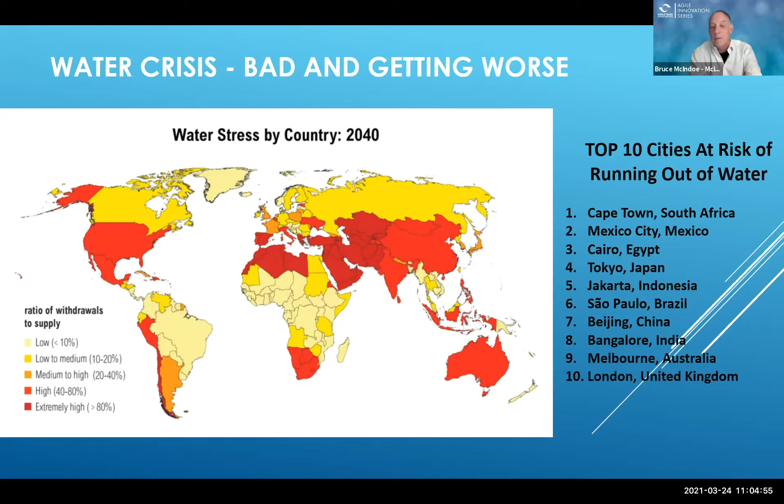And so where is the water going that we're dealing with? When we talk about shortages, we're pulling a lot of water out of aquifers that have stored up over hundreds of years or even millennia. These ancient reserves are not easily replaced. And that's what a lot of, for example, the drought in the US is driven by - we're basically pulling money out of our savings account, but we're not putting money back in.

70% of that water is consumed in agriculture, and we're going to talk more about that today. But that's the number one consumer. 11% represents what we use for our living, in our cities and those kinds of things. So as we think about making gains on water conservation and water management, agriculture is and continues to be the prime target.

The other obvious thing we think about is people. In the first session on water and people, we learned that if we don't have water within 2 or 3 days, we die. When you talk about an existential threat for a person or a community, water is it. That's why for countries that don't have their own indigenous water sources, it's a national security issue. If somebody turns off the tap, that's it.

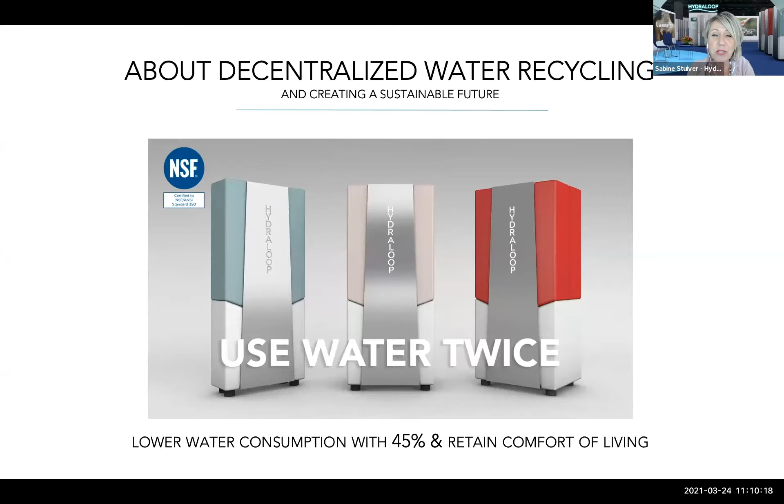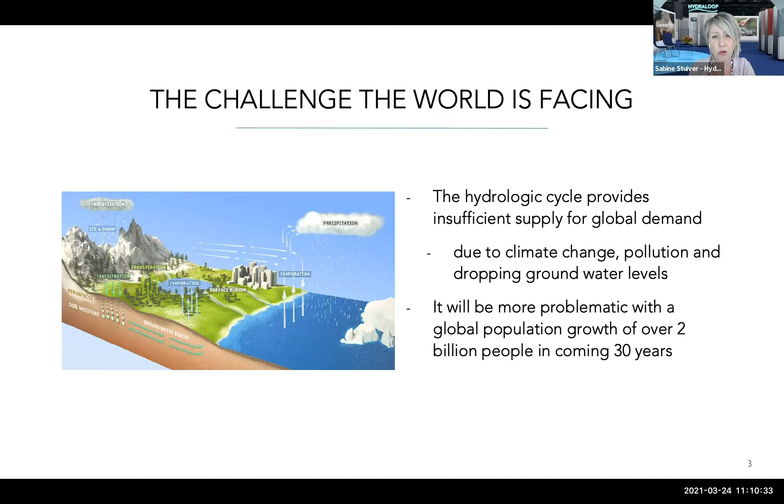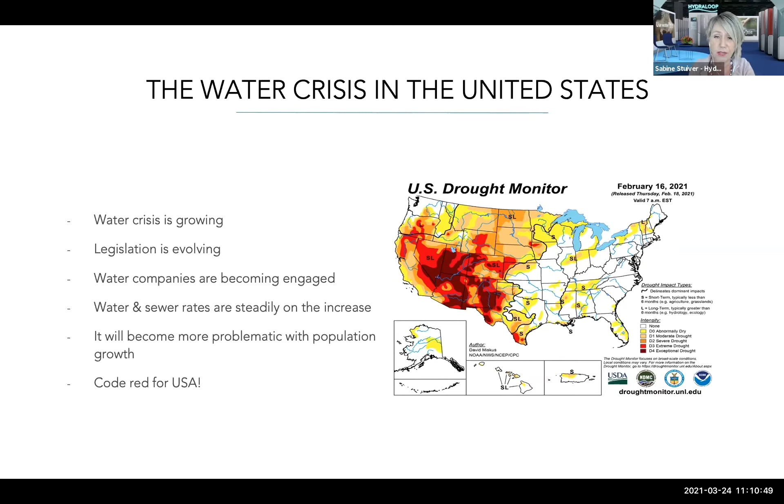So more and more research is pointing to the same direction, to our vision of the future, and that is to use water twice. We think it is very easy because we can be so much more efficient in the use of water by using decentralized recycling, water recycling as an alternative source. And we look at it like this.

Every building has its own water source, and this is lightly contaminated water. Think about hand basin water, shower, air conditioning or cooling water, etc. If at the building, at the spot, decentralized, we can collect this water, treat it and disinfect it, so it can be reused again on the spot, you can actually save up to 45% on tap water supply, and you also have a lot less wastewater.

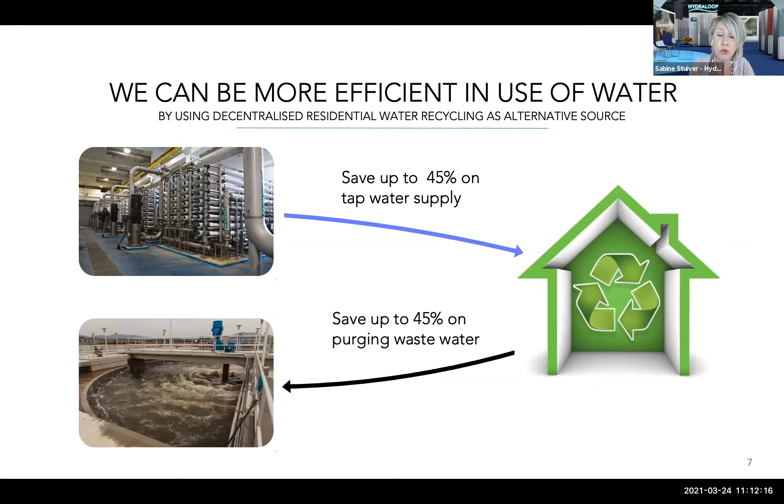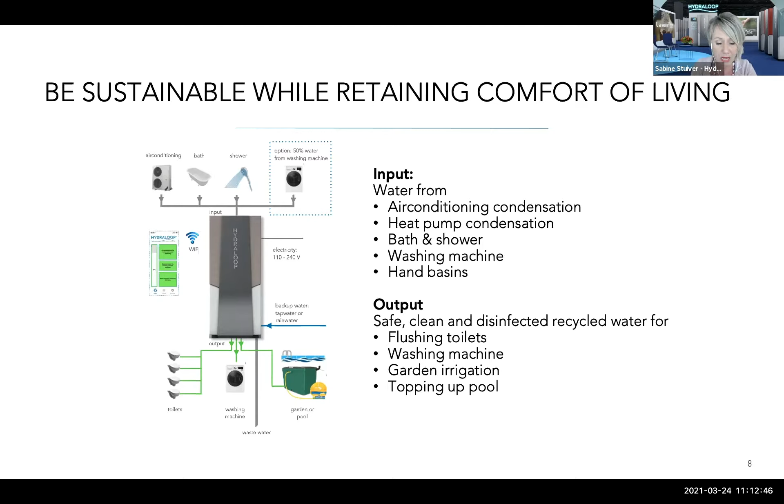It's also 45% less. Now, what kind of water can a system like this actually treat? Air conditioning condensation water, heat pump condensation water, bath or shower water, washing machine, hand basins. The output is safe, clean, disinfected, recycled water. This can be used for several purposes like flushing toilets, the washing machine, garden irrigation, or topping up the pool.

We have created a very new treatment process that we've patented, and that's also why we're winning so many awards, because we do not use filters, membranes, or chemicals. Chemicals are not sustainable, so we're not going to use them. Filters and membranes work perfectly in water treatment, but they clog and need a lot of maintenance. We wanted to create a consumer product that needs very little maintenance.

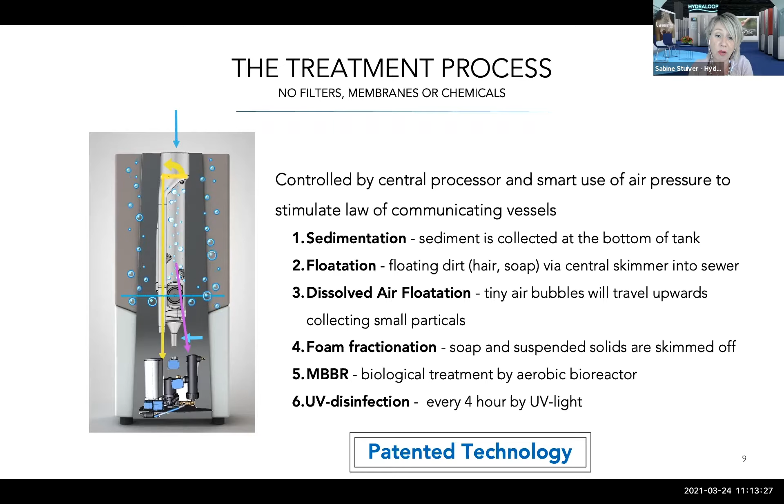So what we've done is we've combined 6 existing techniques, which you can all see here, and that is very unique. With that, we have created a completely new water treatment technology. And obviously, the water that then comes out has to comply with the highest international standards, and it does.

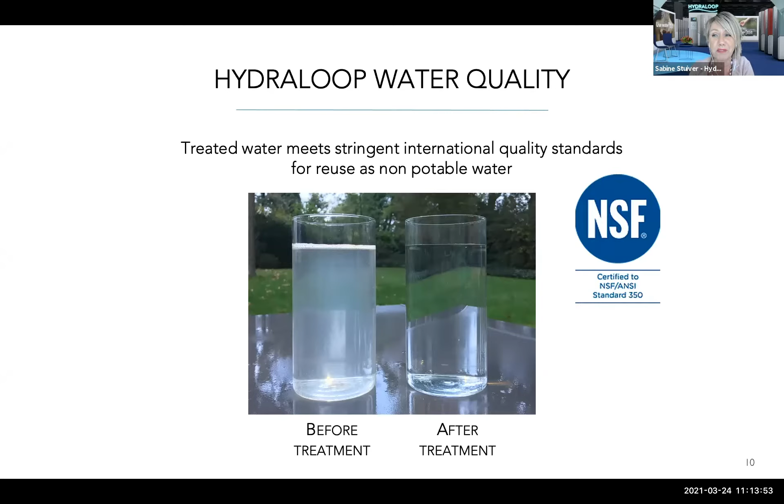To visualize it, on the left you see the water going into the system, and on the right you see how it comes out. I'm very happy to say that we don't only meet NSF 350, we are actually certified for NSF 350. So the water quality is perfect for all the usage that I just mentioned.

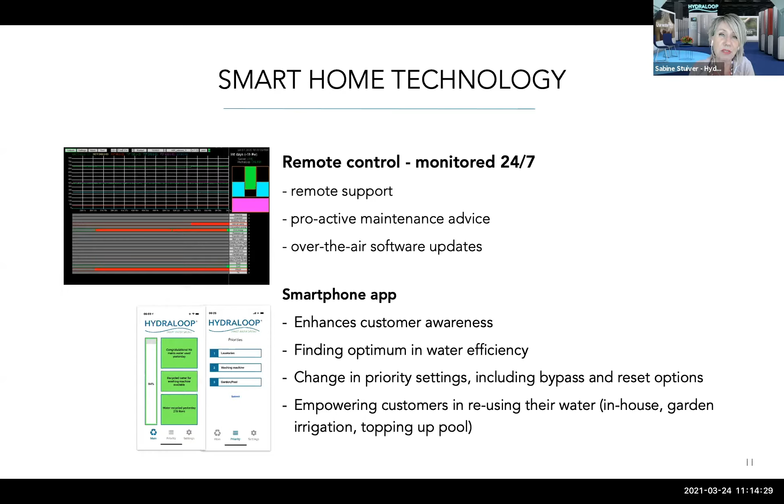Now, all the systems are remotely controlled and monitored 24/7 in our server. That means we offer remote support, proactive maintenance advice, and over-the-air software updates. All this information is returned back to the customer, and that gives them the information. It enhances their awareness of how much water they have used or saved. They can find an optimum in their water efficiency, but they can also change their priority settings, and it empowers customers to use their water in the way they want to use it.

Return on investment - this is asked a lot. What is the return on investment on a system like this? Well, sometimes I think, why do we talk about return on investment when we're getting close to day zero? But it depends on country, region, and municipality. It can be between 2 and 12 years, depending on where you live and the price of water and wastewater.

But some of the benefits are anyway, 45% savings on tap water consumption. You reduce your wastewater also by 45%. You have savings on your water and wastewater bills, but there's also an energy reduction component and a carbon footprint reduction. It increases the property value because it complies with increasing regulation and sustainability requirements, and you become more resilient and off-grid.

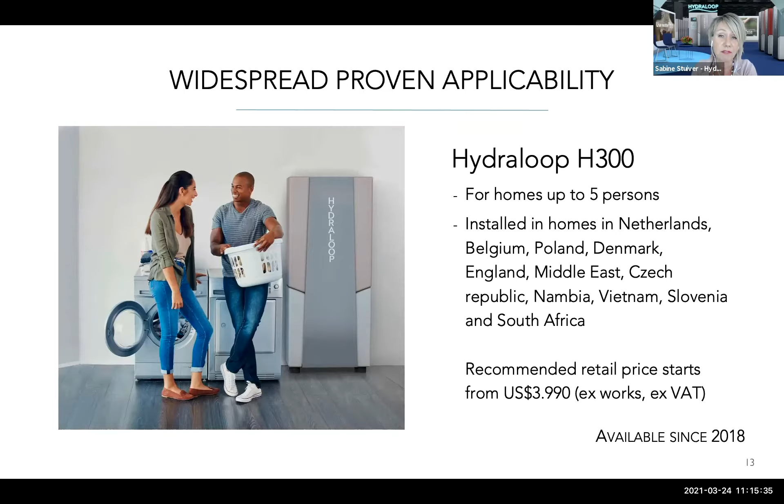Since 2018, we have come to market with the H300, the Hydraloop H300. This we created for the home, for a family of 4 or 5 persons, and we've already sold in many countries in Europe, the Middle East, and Southern Africa. This year, in January, last January in Vegas at CES, we launched the Hydraloop H600. Now, this is the bigger brother, so to speak.

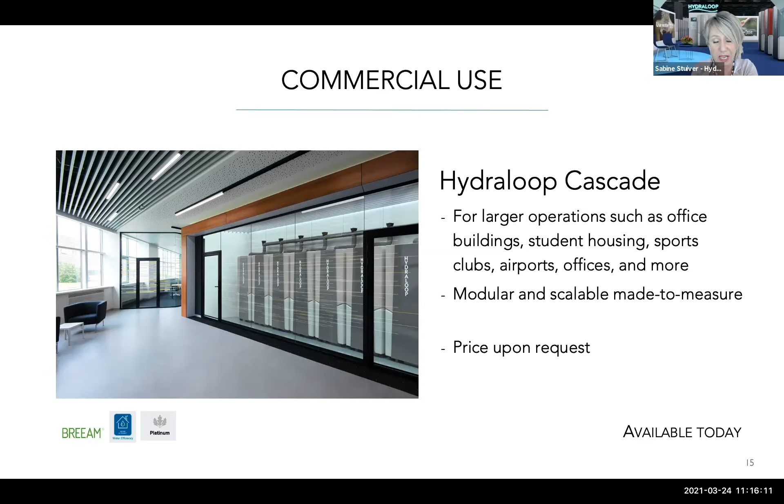Some of our offices are in the US at Hydraloop Inc, and we're actually just opening a joint venture in the Middle East as well. Our systems are Dutch designed, made in the Netherlands. Here you can see some pictures of the factory, and this is the vision we are propagating everywhere.

All construction should be built recycle-ready, because you're building for the future, and it can so easily be prepared for the installation of a water recycling system, since the plumbing costs hardly any extra and it's very easy to do in new construction. In the coming 20 to 30 years, all other buildings will be made more sustainable or will be changed, so that's a perfect timing to also install a decentral water recycler then.

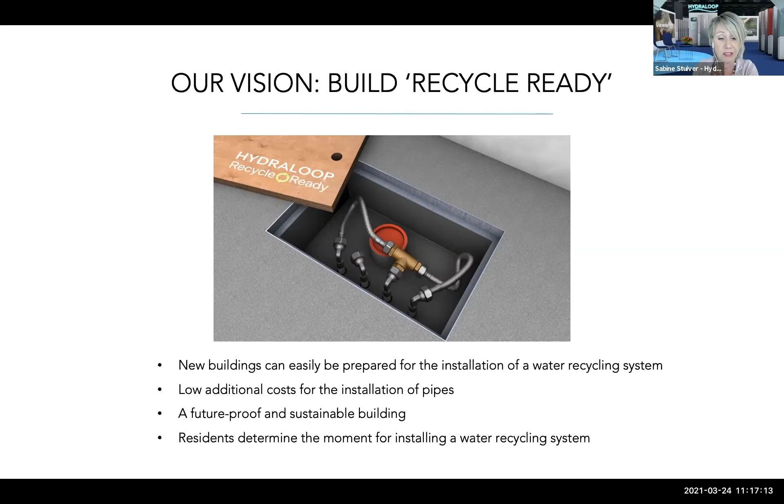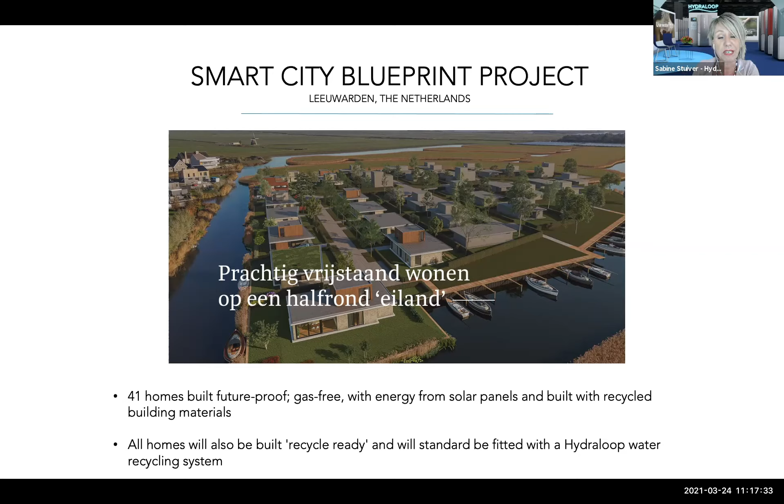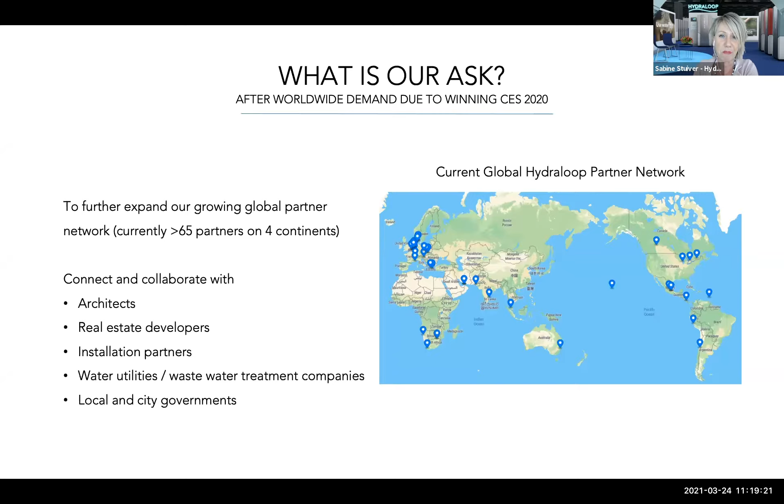That mission is that within 10 years' time, no building will be built without its own decentral water recycling system. It will not only be a Hydraloop system, we won't be able to do that alone, but we would like to be the Tesla of water recyclers in the world. So this is our motto: be wise, use water twice.

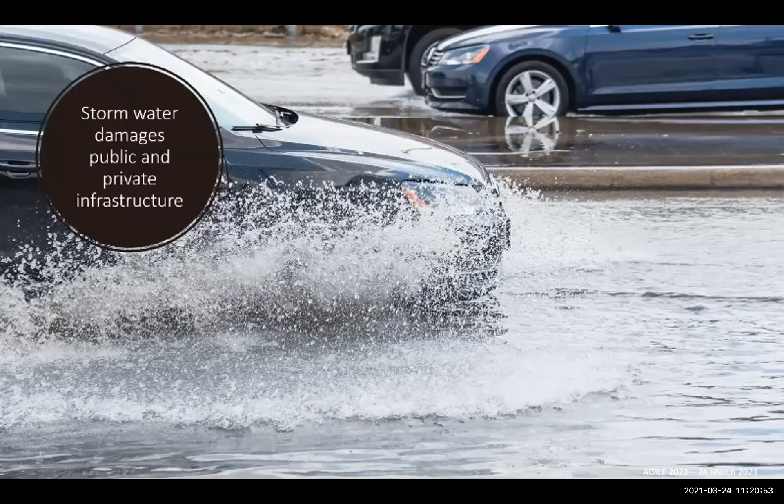Climate change not only causes heavy rainfall damaging public and private infrastructure, as we unfortunately can witness at the moment in Australia, it also causes longer periods of drought that put pressure on our sweet water resources, agricultural production, and nature. Next to the stress that humans and nature suffer, climate change brings an enormous impact on our economy.

Urban Rainshell offers a natural-based solution to become more resilient to heavy rainfall and drought. We buffer, purify, infiltrate, and reuse rainwater with a patented system that uses natural and circular materials as much as possible. Our Urban Rainshell stores stormwater in underground beds of seashells. Instead of temporarily buffering and discharging stormwater as fast as possible into our rivers and sea, with the Urban Rainshell we store and use this precious rainwater.

Our system is natural-based, super environment-friendly, uses no energy, absorbs CO2, and requires very low maintenance. It can be applied in every location regardless of the existing infrastructure. It supplies a long-term solution from which multiple future generations can benefit due to its circular design.

We created the following animation to show you how Urban Rainshell works. This is Urban Rainshell, and here's how it works.

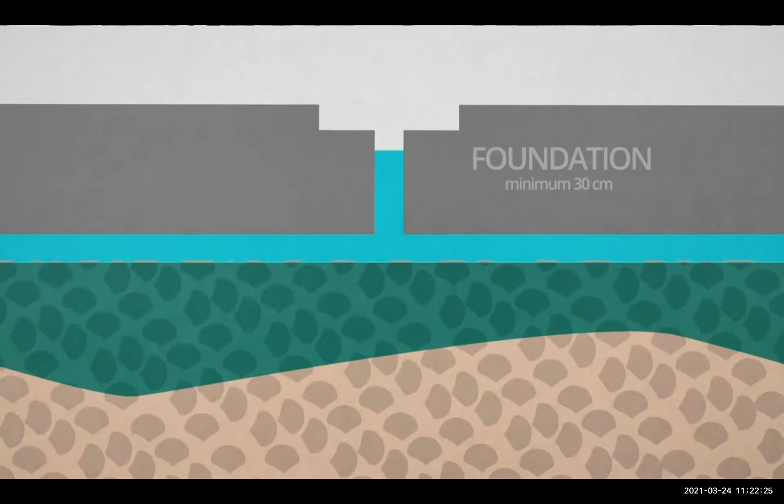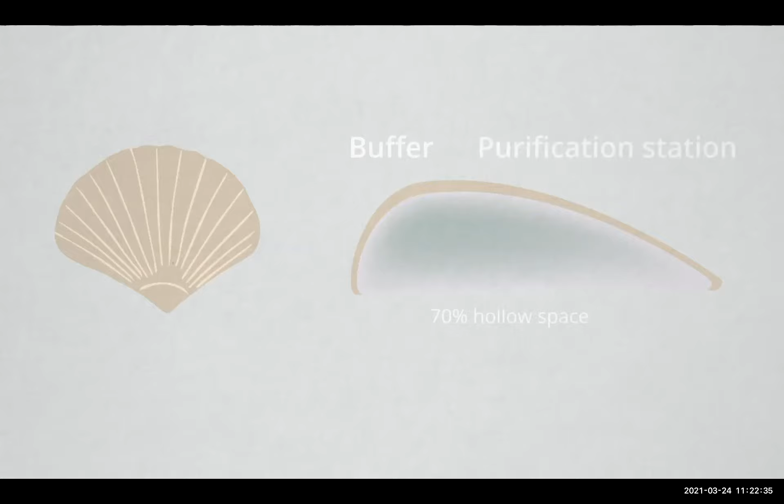Rain arrives via the roofs, streets, sidewalks, and gullies into the supply drain of the Urban Rainshell system. There, under a foundation of at least 30 centimeters, millions of washed seashells collectively form a buffer in which heavy showers can be stored very quickly. The shells have 70% hollow space and function not only as a buffer, but also as a natural purification station for the rainwater. As a result, the system breaks down organic pollution, preventing the system from clogging up. Moreover, the shells are lightweight and CO2 binding.

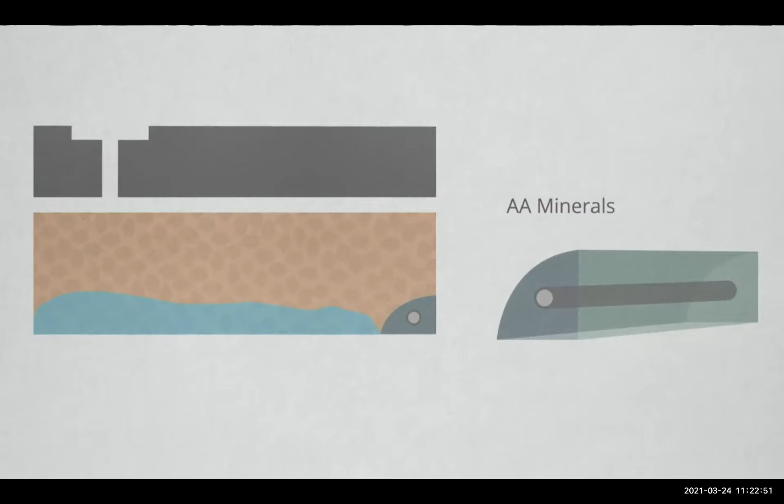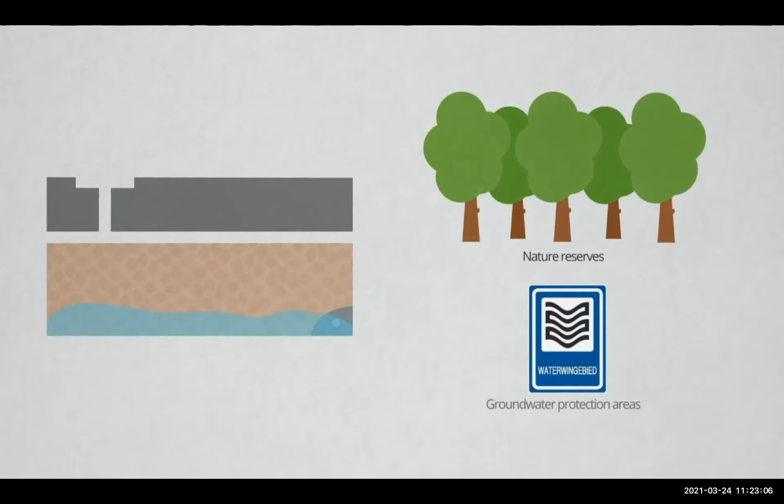After going through the shells, the rain is led to a drain via the innovative mineral mix AA Minerals. AA Minerals is specially designed to remove heavy metals, mineral oils, and PAHs from the water. The rainwater is now completely clean, so it can be safely infiltrated into nature reserves, groundwater protection areas, or into aquifers in the deep subsoil, where it can form a freshwater bubble.

Also, the rainwater can be meaningfully used for all kinds of applications, such as sprinkling sports fields, as firefighting water, or as play water. The system can be applied under green areas, parks, or in combination with wadis, but also under town squares, parking lots, or roads. Depending on the application, a different foundation structure must be chosen.

In the next slides, I will present to you some of the features of the Urban Rainshell.

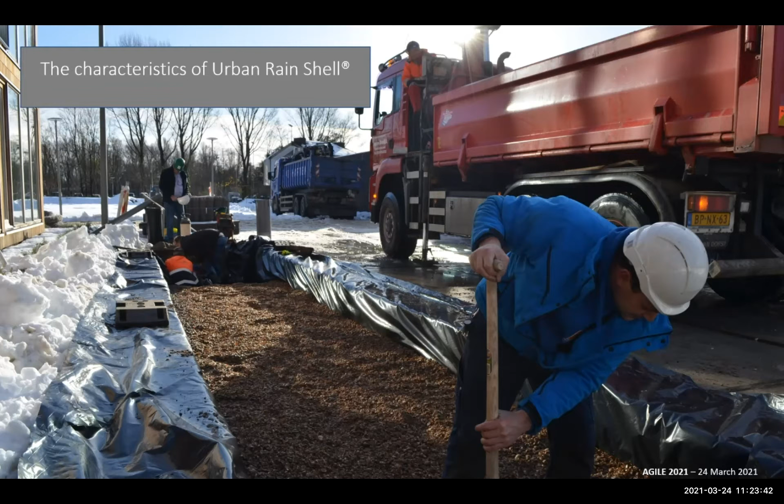Our natural material to buffer stormwater has an extremely high buffering capacity of 70% and an enormous infiltration speed of 1,300 meters per day, allowing the rainwater to be stored very quickly.

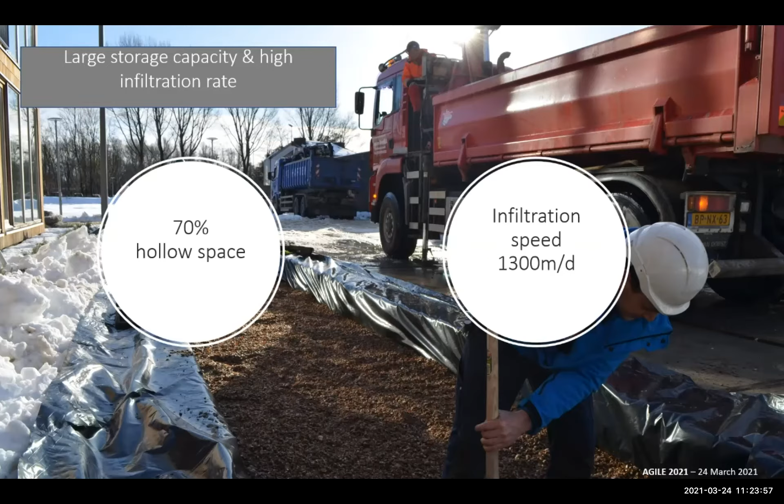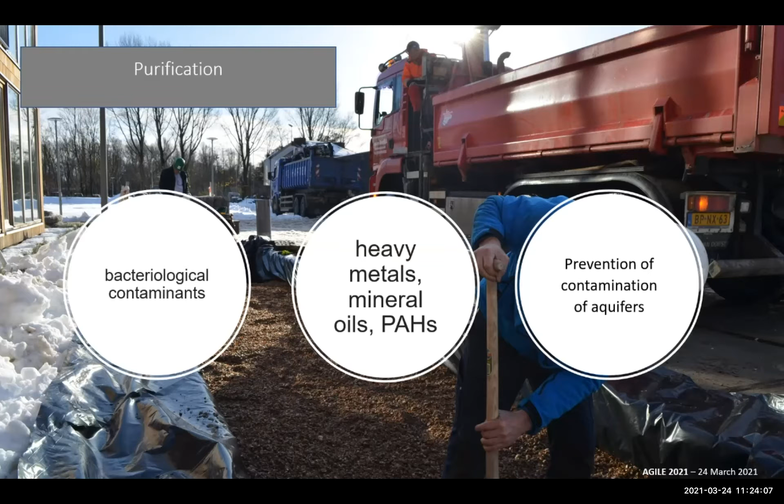The shells break down organic contamination, and the innovative mix of recycled minerals removes typical urban contaminations such as heavy metals and mineral oils. Our system uses natural material and therefore reduces the use of plastic. As our system uses gravitation, there is no external energy source needed for buffering nor for water treatment.

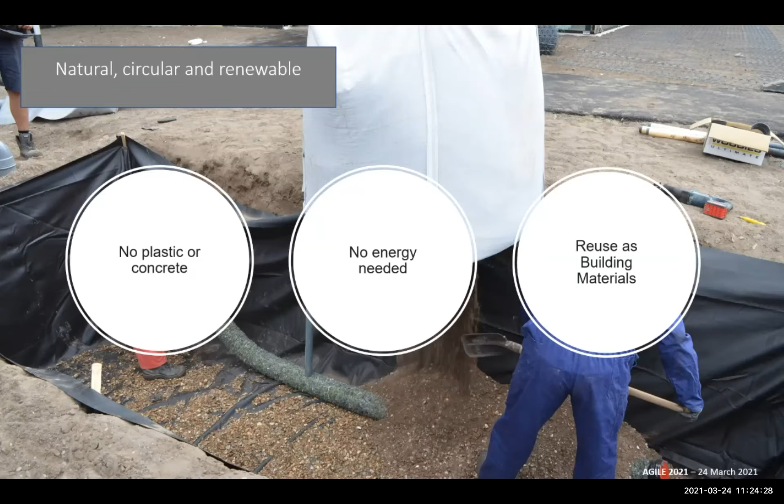After the filter lifetime, it can still be used as building material without damaging the environment. In this way, it will not create a waste stream. The system breaks down organic contamination and therefore doesn't clog, and is easy and cheap to maintain. It can also be designed to be fully functioning for up to 80 years.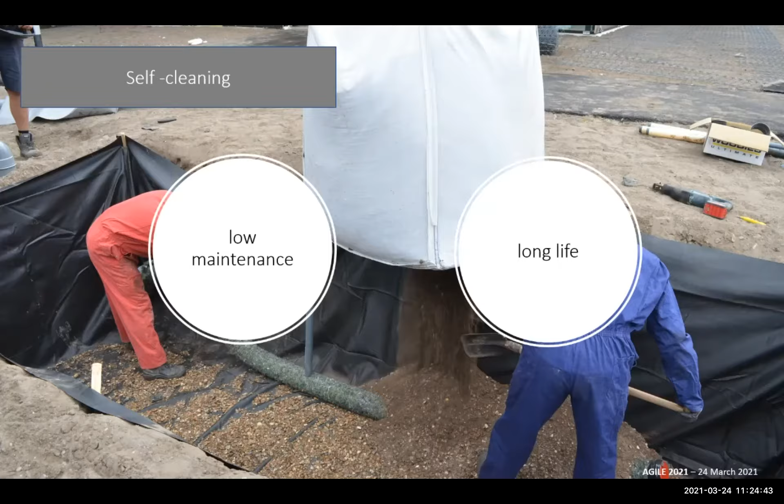Due to the nature of the material used, the system is not bound to any standard dimension and is very flexible in shape and size. In addition, its flexibility allows the Urban Rainshell system to be used with high groundwater levels. Another benefit is that it can be integrated into existing underground infrastructure with cables and pipes. The Urban Rainshell system has no standard size and can therefore be easily adapted to the requirements of a specific location.

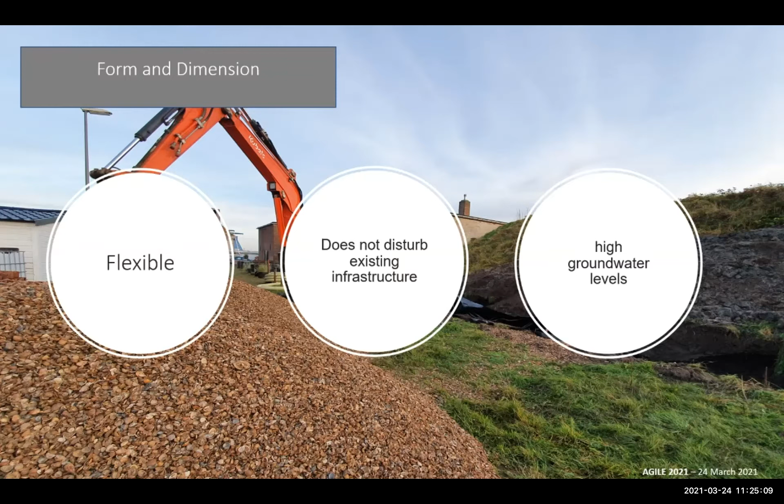The lightweight nature of Urban Rainshell makes application in areas of land subsidence very interesting due to the reduced risk of settlement, without the risk of buoyancy. The Urban Rainshell also binds about half of its weight in CO2.

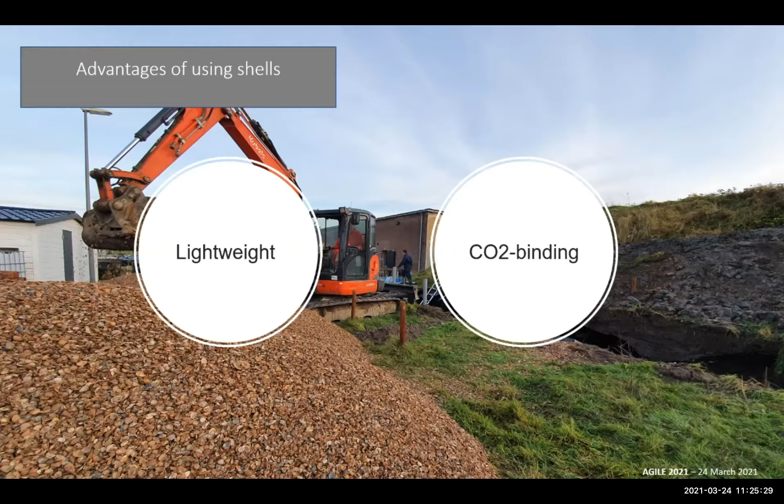With the Urban Rainshell system, rainwater is made suitable for reuse, thus saving drinking water. Rainwater can be made available for various applications, such as irrigation of sports fields or public greenery, firefighting water, play water, process water, etc.

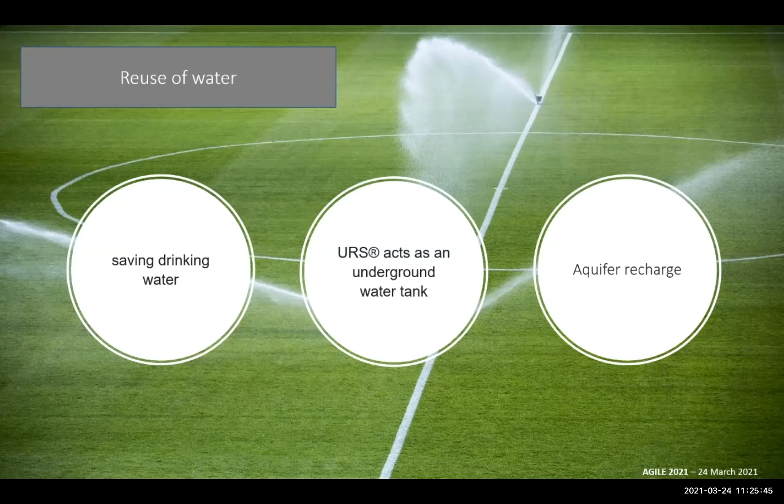Urban rainshell is not only ecological friendly, but also economical friendly. To prove that, here's an example: a system designed for the size of 4 hectares and for 30 years of use, treatment capacity in Houston, Texas. In this case, there are 28,000 cubic meters of treated water made available per year.

In Houston, the present price for 1 cubic meter of drinking water is 59 cents. The price of 1 cubic meter of sweet water filtered by urban rainshell in Houston is 44 cents. That is a 25% saving on the price of available sweet water, and a return on investment of 172% over 10 years. Which means urban rainshell is not only a great way to prepare for climate change, but also a great investment.

In the next part of my presentation, I would like to show you different locations where urban rainshell is already installed. In the municipality of Goes in the Netherlands, our system was installed under a hockey and rugby field with the purpose of minimizing drinking water use. Urban rainshell makes water available to irrigate the fields before each game.

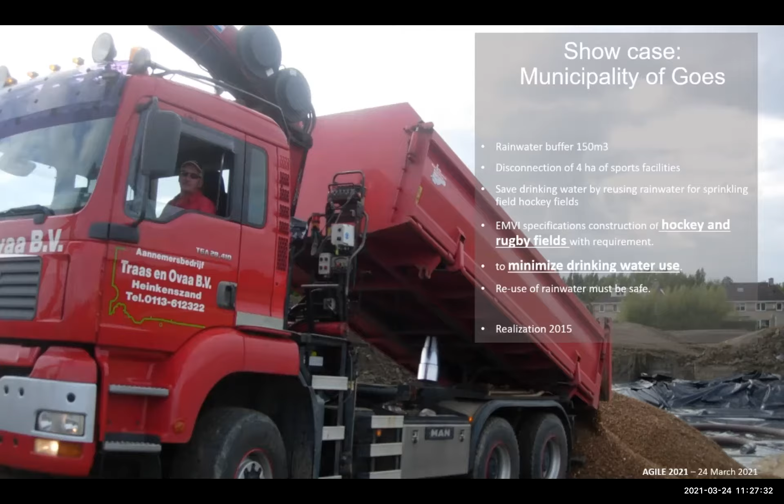Next to the Natura 2000 area, a European Union protected nature reserve, our system treats contaminated water, allowing it to be infiltrated into the protected reserve. In this way, the municipality saves a lot of costs on pumping the previously contaminated runoff water out of the area.

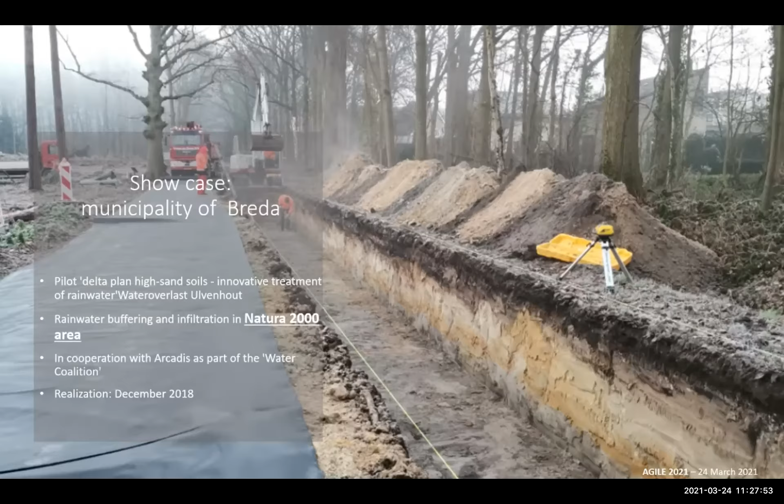In the next location, the water produced by our system is being buffered and used as firefighting water supplies. During dry periods, the firefighting water system can be refilled from the aquifer that is recharged by the urban rainshell system during wet periods.

In the city of Amsterdam, our system was installed nearby a parking lot. The water is being used as play water in a playground. The municipality of Amsterdam chose to keep part of the system visible, so the eco shells also function as elements to play with.

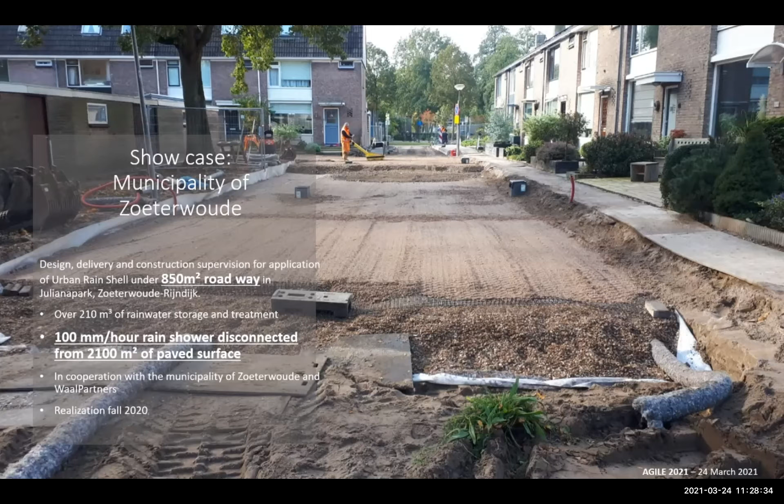In the city of Zoeterwoude, urban rainshell was installed under a road in a residential area to prevent damage from flooding. The water is treated and discharged safely into surface water.

In Belgium, we have installed our system next to a shopping mall, protecting it from overflow. The filtered water is used for irrigation of public kitchen gardens and as play water.

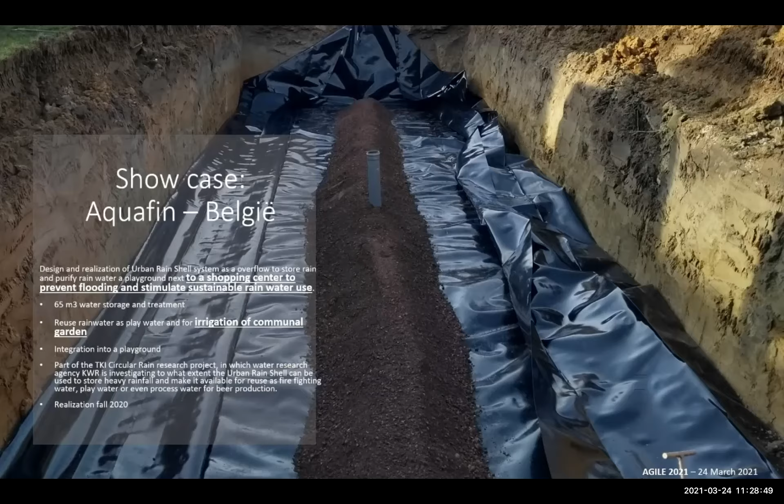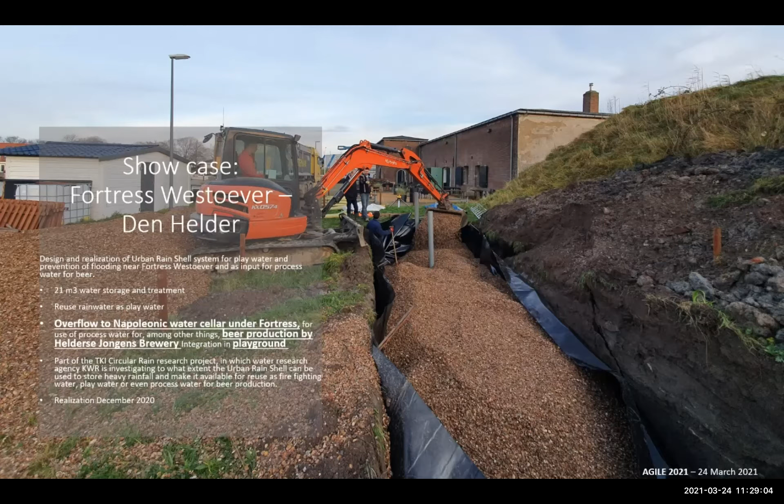Our last completed project was built next to Fortress Westoever in Den Helder. The objective is to sustainably use rainwater as play water and as process water. A cooperation was made with the next door beer brewery, which uses the processed water in the production of their beer.

We believe many other companies and entities can benefit from the advantages of urban rainshell, such as hotels. Hotels can prevent water damage to their infrastructure and inconvenience for guests. The filtered water can be used to water greenery, fill swimming pools, or create playgrounds with water for guests. In gas stations, urban rainshell can help companies protect their environment from contaminated runoff water, improving their corporate social responsibility and meeting local environmental legislation.

Insurance companies may be interested to present our system as a measure required in order to prevent the great damage created by heavy rainfall floodings and/or droughts.

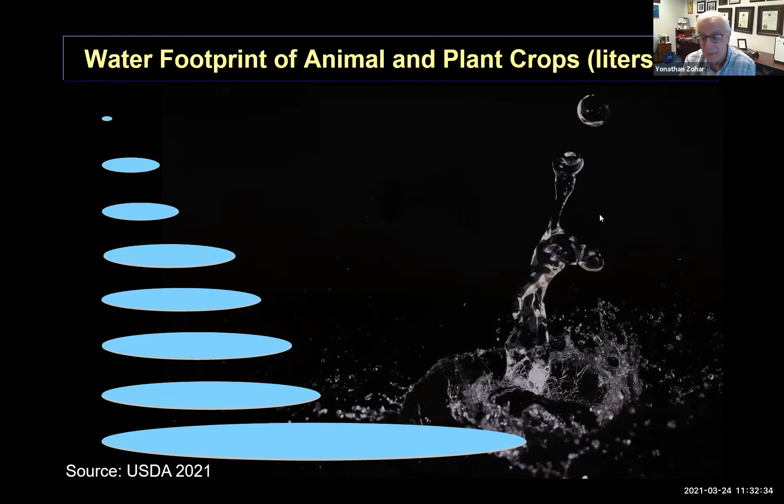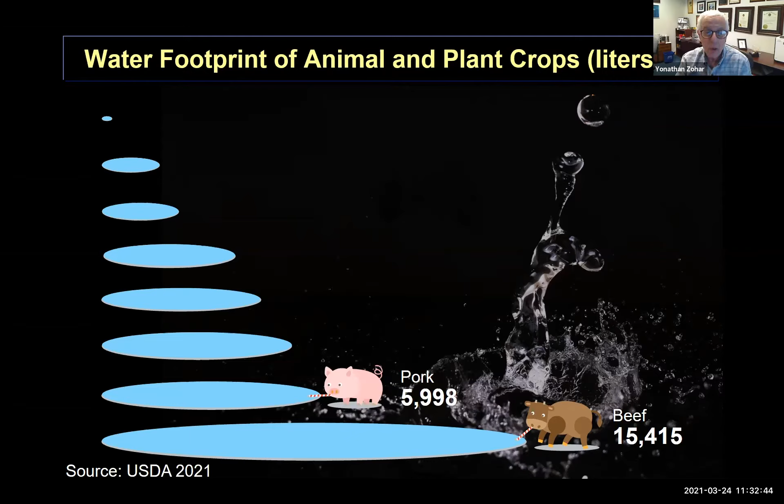Well, surprise, surprise, here is the answer. Beef uses most water per kilogram meat. Then pork, then chicken, rice, wheat, corn, potato, and here you are with fish. So fish are the winner. Fish by far are the most efficient users of water per kilogram meat produced, per protein.

But those are fish grown in RAS, recirculating aquaculture systems. We'll get back to it in a second.

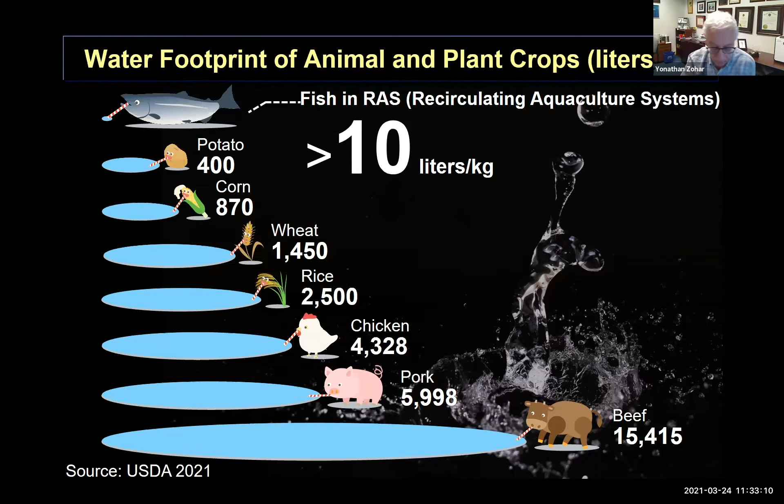Not only that, but fish are also the most efficient feed converters into proteins. This is from National Geographic, a few years ago: cattle uses 6.8 pounds of feed per pound of meat, pigs 2.9, chicken 1.7, and fish only 1.1. And feed takes water to produce. So again, fish are the most efficient water and feed users.

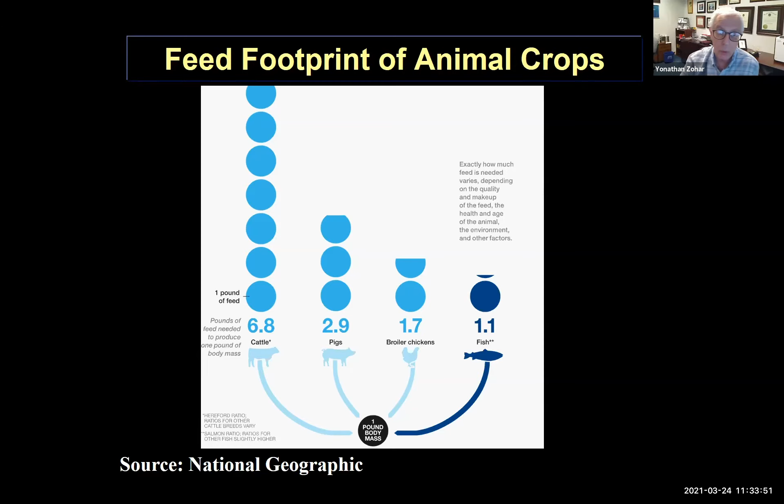So how do we do that? Especially for the water, so little water used. Well, we have to back up and say that it all starts with the fact that fish are the last hunt and gather animal crop. We really are emptying our oceans.

And if you think about it, you don't go to the wild to catch your chicken, right? Or you grow them in agriculture, you grow them like that. And you don't go to the wild to catch your cattle or pork and so on. But you do it for fish, which is quite sad, because it leads to what the Economist has actually referred to as the tragedy of the ocean, emptying the ocean. But the Economist also a few years later talked about the blue revolution, the promise of fish farming.

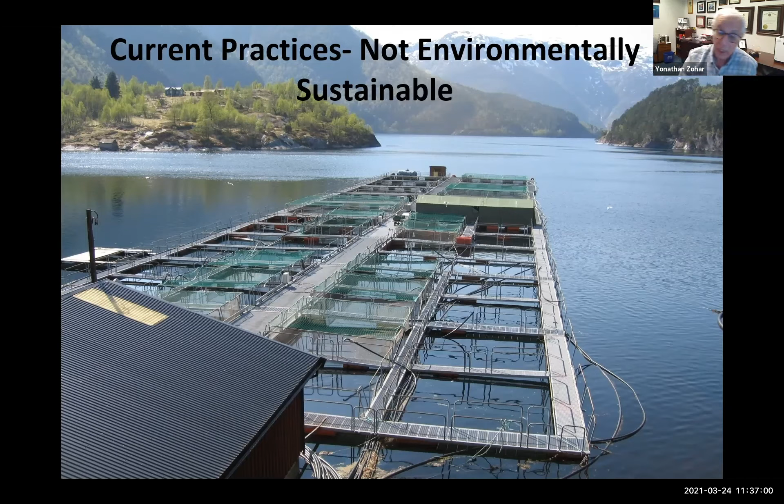And the issues are environmental or chemical pollution. There is a lot of runoff from the fish net pens into the marine coastal environment. There is biological pollution, some fish that are selectively bred and some fish that are non-native, Atlantic salmon in the Pacific Northwest, they escape, and there is biological pollution and disease transmission that goes actually both ways. Farmed fish have been blamed for transmitting disease to the environment, but it is also the other way around.

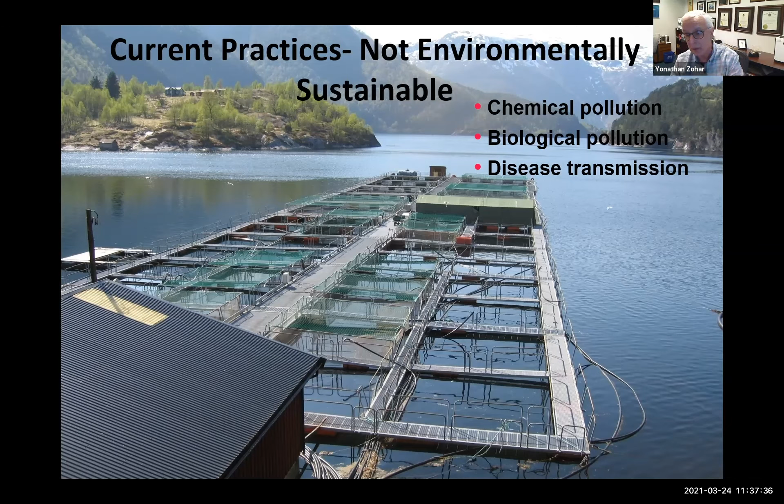So this is not environmentally sustainable. So we here at IMET and many others have been working on developing the next generation of aquaculture technologies that are land-based, fully contained, and recirculating.

And then we recycle the water again and again and again in the system. We reuse the water. And the secret to the success is in those drums, cylinders we call biofilters. There are friendly microorganisms, bacteria from the marine environment that live in symbiosis with the fish, and they remove the chemical waste produced by the fish as the water is recycled.

And as such, we develop systems now that are zero waste to the environment. They are disease-free. They are flexible. We can do high temperature, low temperature, salt water, fresh water. And as such, they are generic. We can diversify, and you'll see how we diversify in a minute. And they're applicable for rural and urban locations. They can go anywhere, we don't need to be by the sea or by a lake.

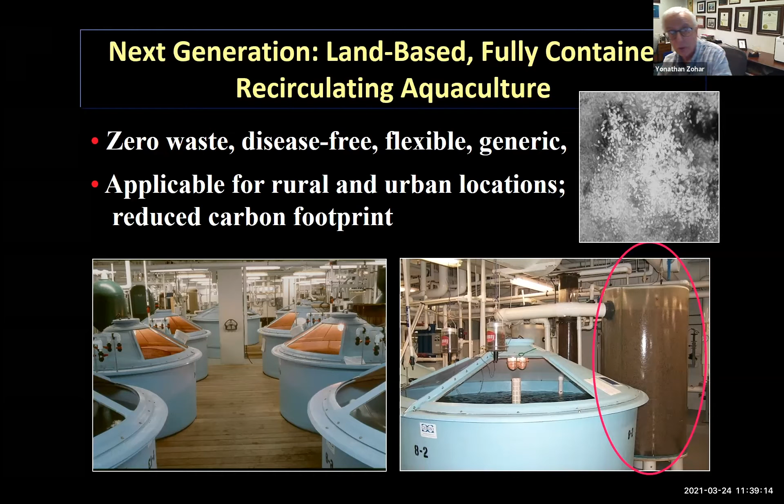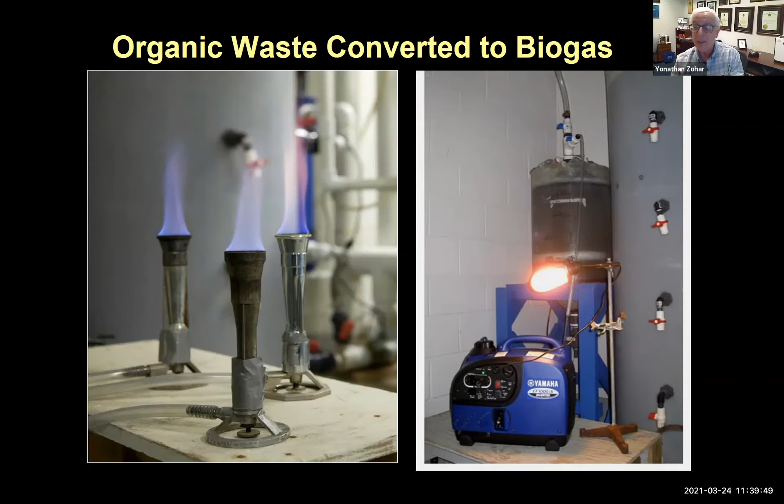Therefore they can go next to your markets, next to your airports, and you reduce the carbon footprint of your operation. Here's one example of how we use marine methanogens, microorganisms from the marine environment, that convert the organic solid waste produced by the fish into fuel-grade methane. Right off the fish tank, you can start a Bunsen burner, or run a methane-driven generator, a biogas-driven generator, and produce electricity. So we are converting the waste into fuel-grade biogas that is used to offset the energy cost of the operation.

We also do it for Maryland's Holy Grail, which is the blue crab. We close the life cycle, developing hatchery technologies for the blue crab, and Steve Phillips, who is, I think, a board member of the World Trade Center Institute, has been very helpful in supporting this project, the blue crab.

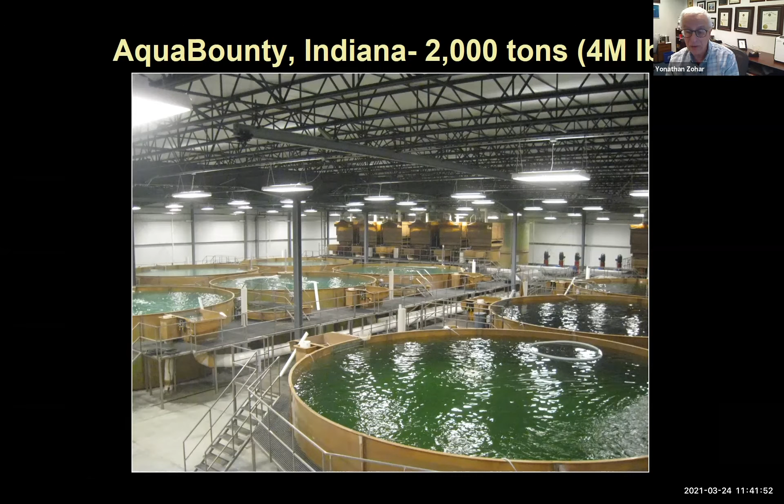I'll give you a few examples very quickly. AquaBounty, a company that grows Atlantic salmon on land in Indiana, produces about 4 million pounds annually. Those are large tanks in a warehouse, much larger than what we have in our system, about 70,000 gallons, 36 feet by 10 feet in diameter, 10 feet deep. You can see high densities of fish in pristine water. This is for Atlantic salmon.

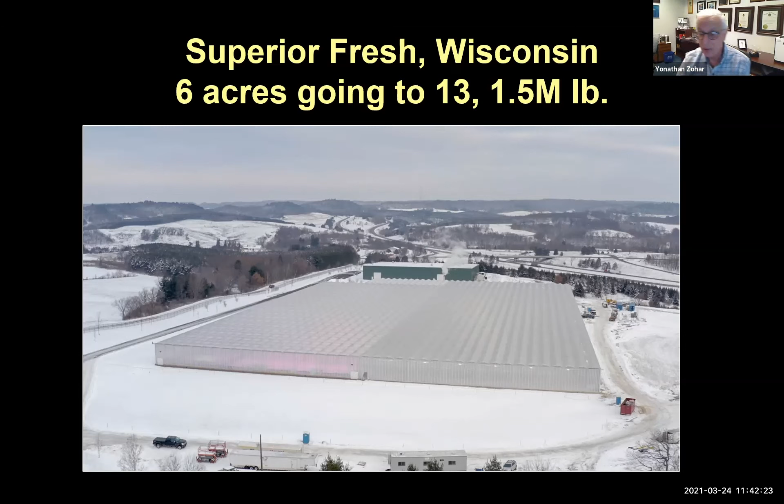This is in the middle of nowhere, in the boonies, Superior Fresh in Wisconsin. Two big buildings, like 6 acres, going to 1.5 million pounds annual production. You see to the left, the building with a little bit of lights - those are LED lights. The nice thing about Superior Fresh: to the right, the warehouse grows Atlantic salmon, beautiful quality salmon in a recirculating, land-based system. Here they use the waste from the fish to grow leafy greens. So it's a beautiful integrated operation.

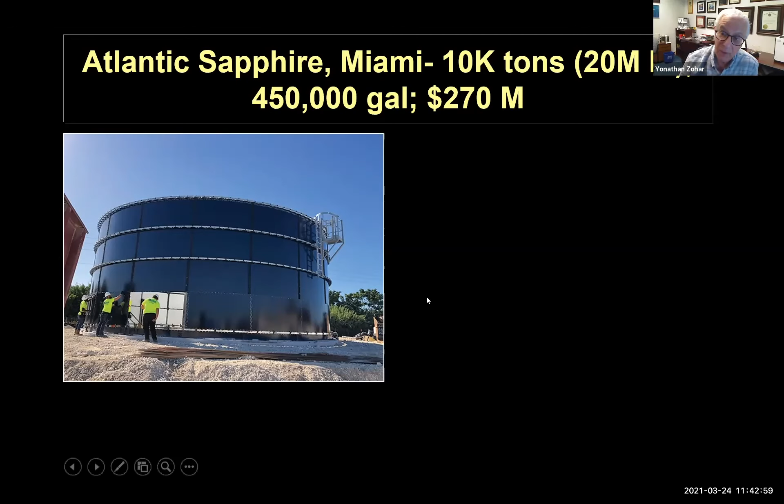Moving to Atlantic Sapphire in Miami, they produce about 20 million pounds of fish, and everything is new. Nothing of this existed 5 years ago. Those are big tanks, 450,000 gallon tanks, built during construction. It's a $270 million investment. You can see them putting fish into the warehouses as they build them. Now they already sell the fish. You can buy them at Wegmans.

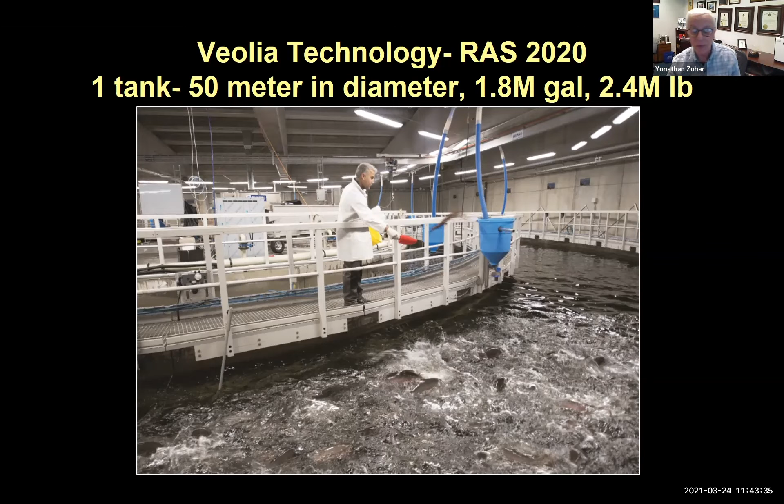Veolia, you all know Veolia, went big time into the field of recirculating aquaculture systems. Aquaculture RAS 2020 has one tank that is 150 feet in diameter, holding 1.8 million gallons of water, just one tank, producing 2.4 million pounds of fish. This is huge, and this is all in one warehouse. With 2-3 tanks like that, you have a large scale operation.

Thank you, Dr. Zohar, and already there are questions about how do I get one for my home?

Just a second, I need to stop. So I assume that these are efficient at scale, not at home scale for growing your own salmon. It's all about economy of scale in this operation, like many other things.